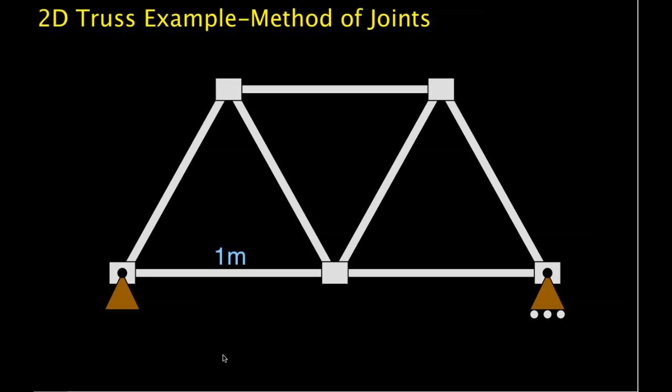Welcome to this video in which we will solve for the tensions in each of the members of this truss by using the method of joints. This truss has 7 members and 5 joints. Each member is 1 meter long, so the truss is made out of equilateral triangles, meaning every angle in every triangle is 60 degrees. The truss has a load of 1 kilonewton at the center.

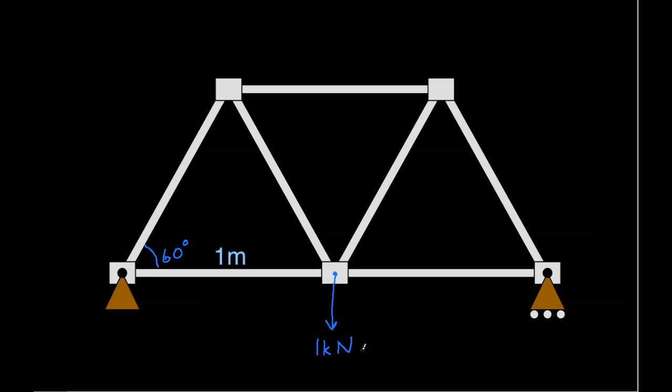With these dimensions and load, this truss might represent a small footbridge with a fairly chubby person standing in the middle of the bridge. We begin by drawing a free body diagram of the whole truss to find the reaction forces. We will then go joint by joint through the truss to find the tension in each of the members.

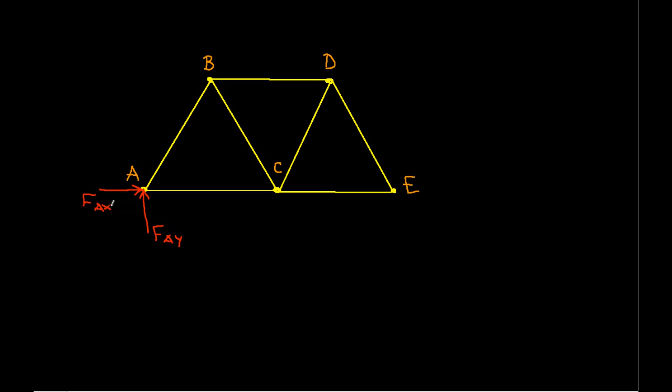Here is the free body diagram of the whole truss. We have joints everywhere the members meet, and then we have the following reaction forces. On the left we have a pin joint, so basically our entire truss is free to rotate. This will give us an FAY and an FAX. And then here we have an FEY. And at the center of the truss we have a 1 kilonewton load. Each of the members of the truss is 1 meter long.

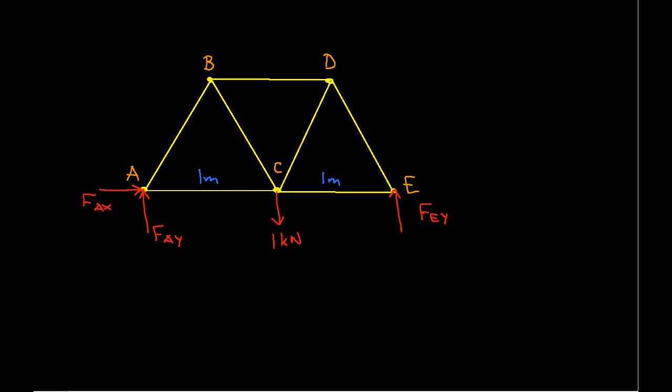Let's look at the entire truss first to find these reaction forces. If we look in the x direction, the only force is FAX, and that's equal to 0. So there's basically nothing pushing the truss either to the right or the left.

Next, let's look at the moment about A. Summation of the moments about A is equal to 0. We'll choose A because we have 2 forces going through A, so if we compute the moment about A, it makes life a little easier, and we only have 2 forces to look at. We have 1 kilonewton going downwards with a moment arm of 1 meter, going clockwise, so minus 1 kilonewton times 1 meter, plus FEY times 2 meters, since this force acts through a moment arm of length 2 meters. And this is equal to 0.

Once we solve this for FEY, we get that FEY is equal to 500 newtons.

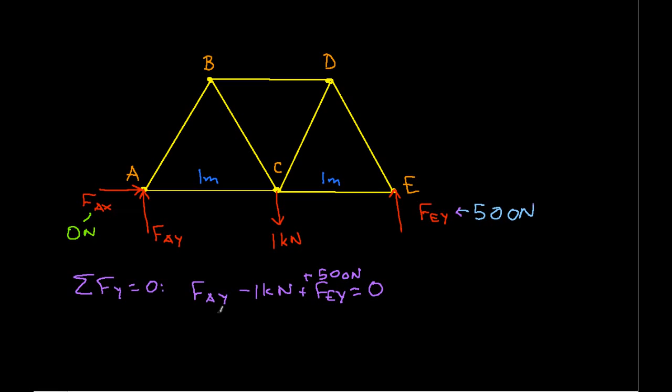The summation of forces in the y direction is equal to 0, and we have FAY minus 1 kilonewton plus FEY equal to 0. We know that FEY is 500 newtons - that's an arrow, not a negative sign. We can solve this then for FAY to get FAY is equal to 500 newtons.

So what this tells us is there is no horizontal force, and the load of the bridge of 1 kilonewton is equally distributed between the left and the right support.

Now we can go through the truss joint by joint to calculate the tension in each of the members. We assume that joints are held together by pins, so members are free to rotate, meaning they can only apply forces in the direction that the member is oriented. We also assume the weight of the members is negligible compared to the load placed on the truss, so we can neglect the weight of the members in our computations.

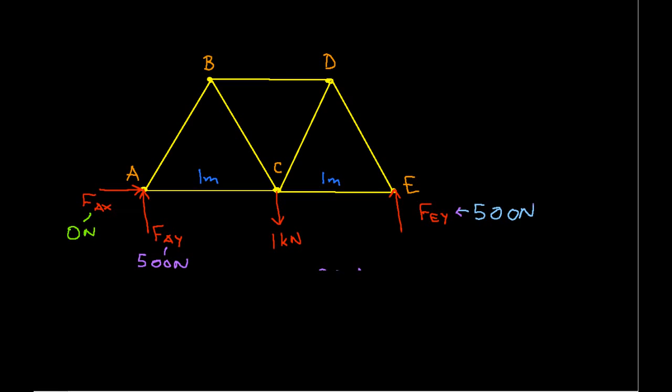Let's look then at pin A. At pin A, we had this force FAY. We have a force to the right, which is TAC, and a force up and to the right, which is TAB. Because I have equilateral triangles, all of my angles here are 60 degrees.

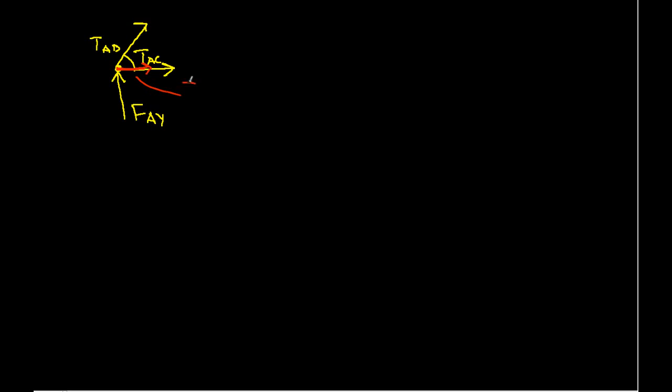At these pins, we can only apply the sum of forces in the x direction equal to 0 and the sum of forces in the y direction equal to 0, because these are points, so we can't look at moments about points. I will have components of TAB: a horizontal component, TAB cosine of 60 degrees, and a vertical component, TAB sine of 60 degrees. I won't go through this in this detail for the rest of the joints, but to make it clear, I've got an angle of 60 degrees here, TAB on the hypotenuse, so this component is TAB times cosine of 60, and this component is TAB times sine of 60.

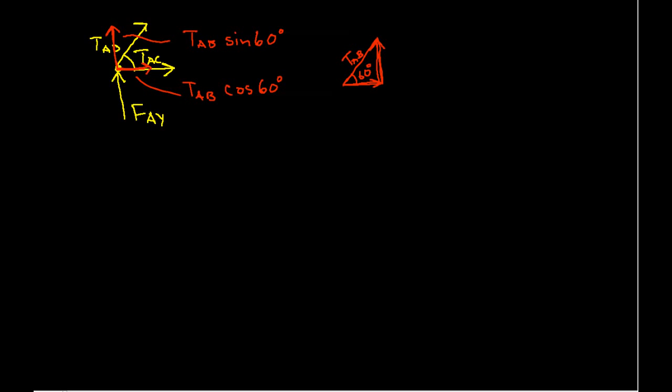So let's sum in the x direction. We have TAB cosine 60 degrees plus TAC is equal to 0.

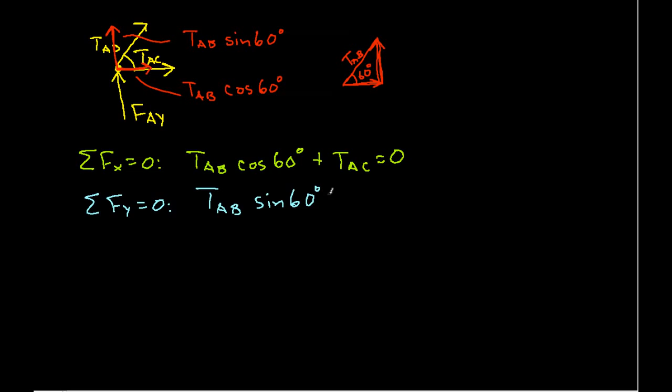And if we sum then in the y direction, we have TAB sine of 60 degrees plus FAY is equal to 0. Remember, we've already computed FAY, so we know this is 500 newtons. So we can solve for TAB: TAB will be equal to minus 500 newtons divided by the sine of 60 degrees, which is minus 577.4 newtons. If you get a negative sign as a tension, don't worry - it actually means the member you're looking at is in compression, not tension.

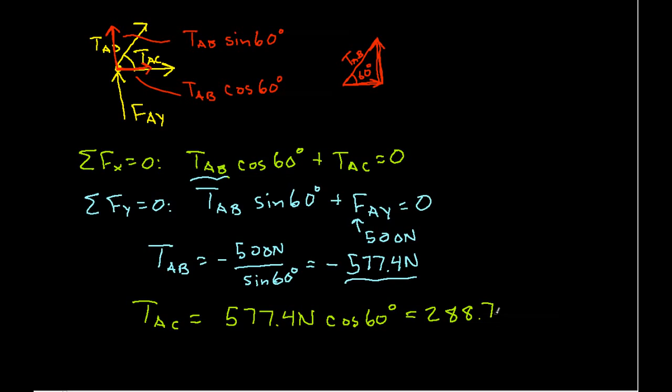So taking this number, plugging it in here, and solving for TAC, we find that TAC is going to be 577.4 newtons times cosine of 60 degrees, which equals 288.7 newtons. The next joint we'll look at is joint B, and we know that here we'll have a tension TAB, which we've already found.

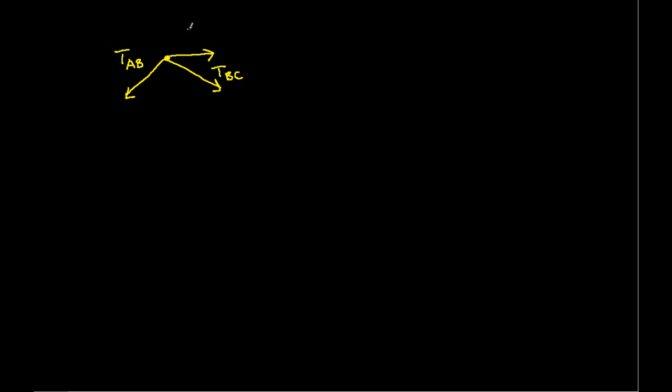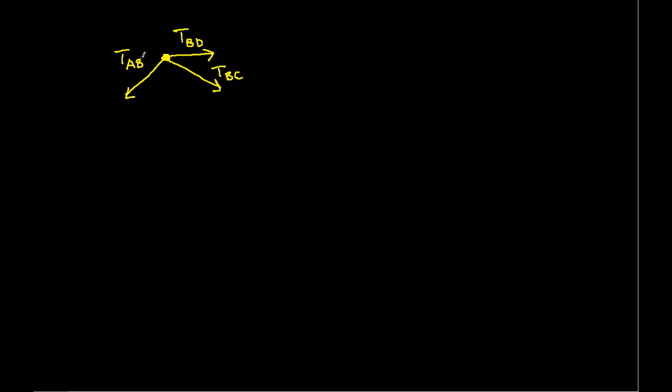So we'll use joint B to find TBC and TBD. At joint B, we have tension TAB, tension TBC, and tension TBD. These are forces. Their magnitudes are unknown. We know their directions because we know the directions of the members. And we know that the angles here are 60, 60, and 60 degrees, even though I haven't drawn it very well.

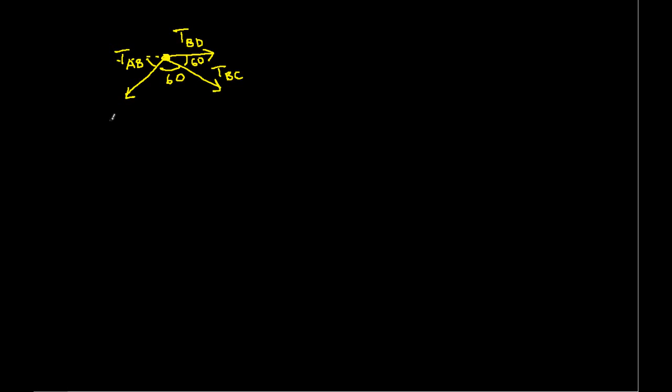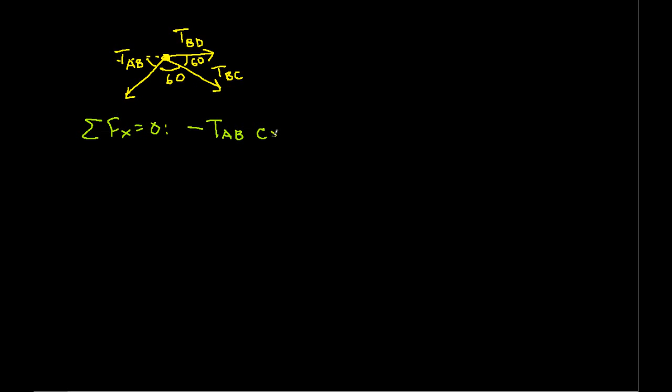Let's look at the sum of the forces in the x direction. Minus TAB, because it's pointing to the left, cosine of 60 degrees, plus TBC cosine of 60 degrees, plus TBD, and this is equal to 0.

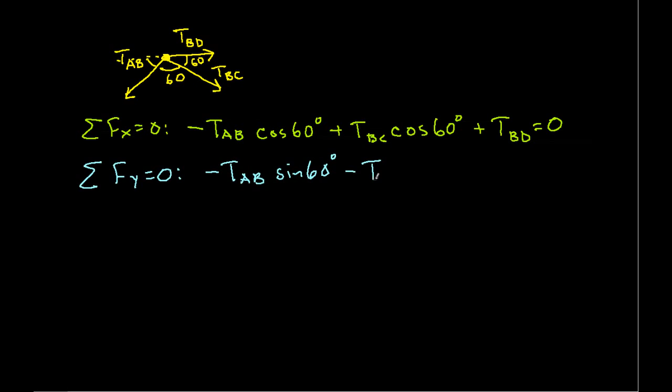So we know the value of TAB, but we don't know BC or BD, so we will have to look at the sum of forces in the y direction. And here we have minus TAB sine 60 minus TBC sine 60 degrees is equal to 0. This is the component of TAB and TBC in the vertical direction.

TBC is equal to minus TAB, and we know that minus TAB is going to be 577.4 newtons. This is from a value that we've already computed.

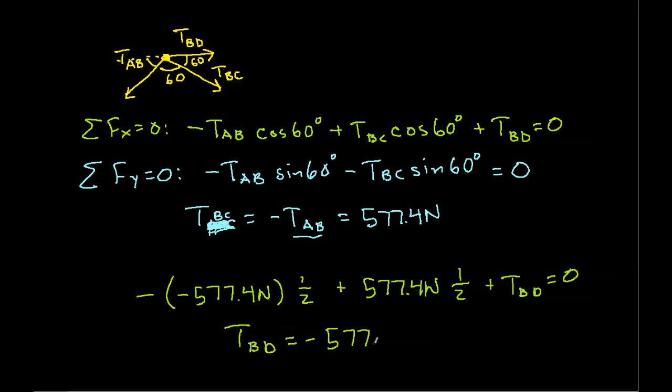If we now take TBC and plug it in here, we'll have minus TAB, which is minus 577.4 newtons, times cosine 60, which is 1/2, plus 577.4 newtons, this is TBC, cosine of 60, which is 1/2, plus TBD equals 0. When we solve this, we get TBD is equal to minus 577.4 newtons. TBC is 577.4 newtons. Again, we're making great progress here.

The next thing we'll do is we'll look at joint C and do a free body diagram there. We know TBC, we know TAC. I'm also drawing the arrows backwards because I've got a cat that's in front of my screen. One should never allow cats to get near one's computer.

Now we'll find TCD and TCE from a free body diagram of pin C. We have TAC, TCE, TBC, and TCD. We also have a load, and the load is 1 kilonewton. All of these angles here are 60 degrees.

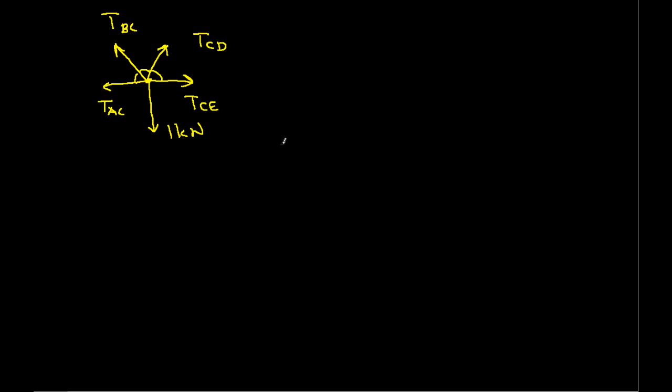As we apply sum of forces in the x direction equals 0, this will give us minus TAC minus TBC cosine of 60 degrees plus TCD cosine of 60 degrees plus TCE is equal to 0. And if we look in the y direction, TBC sine of 60 plus TCD sine of 60 minus 1 kilonewton is equal to 0.

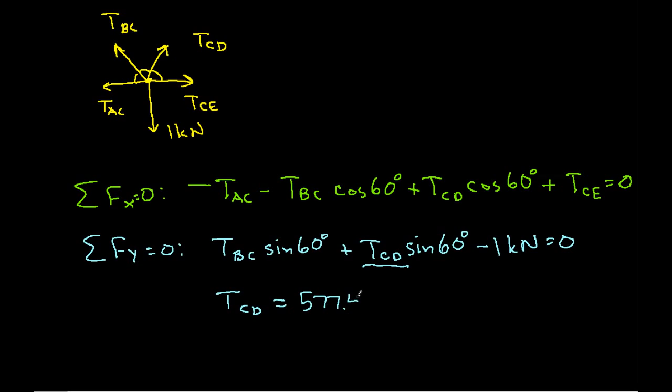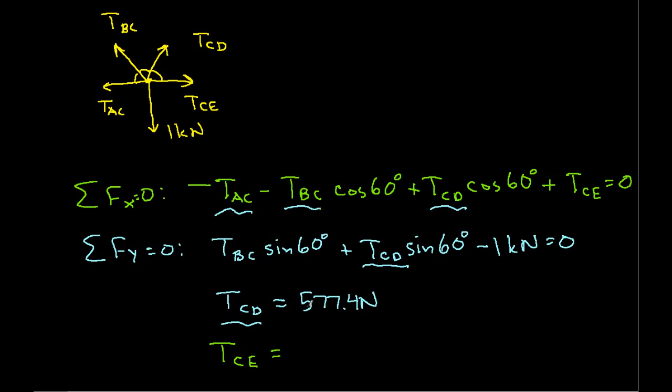And we know what TBC is. We've already computed this, and so we can solve this equation for TCD. I'm not going to go through any of the details here. We can solve it for TCD being 577.4 newtons. We can then take this expression for TCD, plug it in here. We already know TAC and TBC, so we can get TCE is equal to 288.7 newtons. We had TCE is 288.7 newtons, and TCD was 577.4 newtons. We're almost done, and hopefully you're beginning to see that there's some symmetry in these relationships.

So we ought to be able to predict what the tension in member DE is just by looking over here, but we won't. We'll go through the whole thing in brutal detail. The thing to note, though, is that I have only one unknown left. We have found all of these that I've drawn arrows for so far. So now the only thing left to find is TDE.

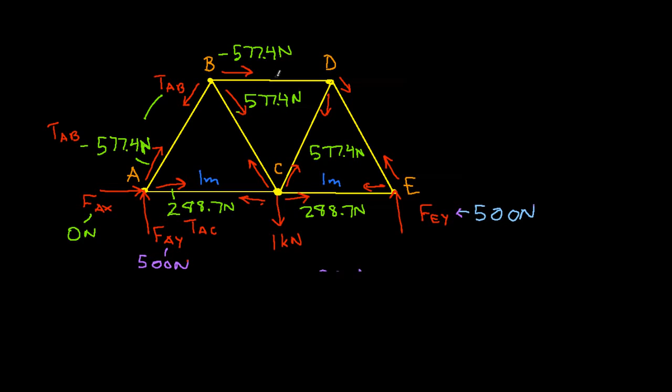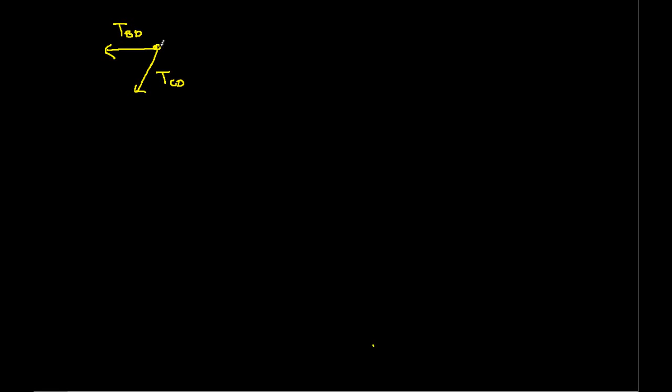So I can look for TDE either at joint E or joint D. It doesn't really matter which one I choose. Actually, let's look at joint D. The free body diagram of pin D: I have TBD going off, I know that. I have TCD, I know that. I have TDE, which I don't know.

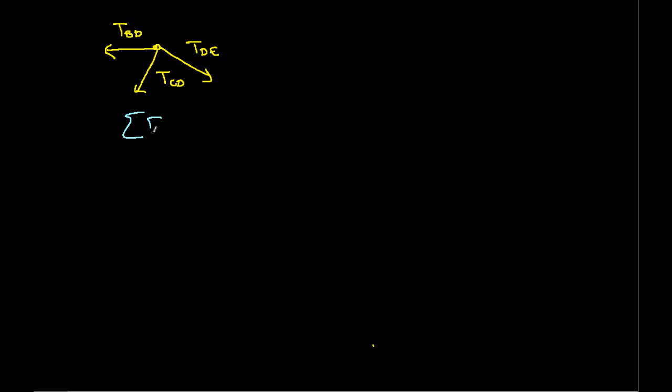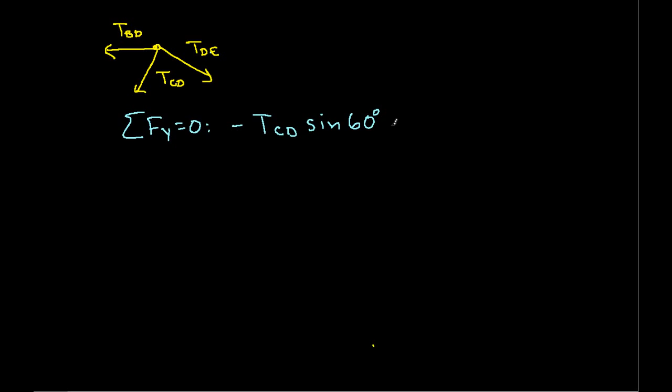I'm going to go straight to the summation of forces in the y direction equals 0. The reason I'm going to do that is if I do this, then TBD isn't going to show up in the sum of forces in the y direction, and it'll make life a little bit easier. So I have minus TCD times sine of 60 degrees minus TDE sine of 60 degrees equals 0.

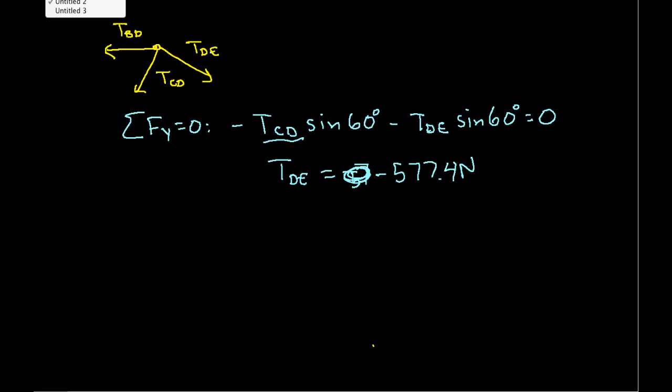And I can solve this for TDE, because I already know TCD. So I solve this for TDE is equal to minus 577.4 newtons. Okay, so I'll go back to my free body diagram and write this in. This is minus 577.4 newtons. The members where the tension is negative are actually in compression.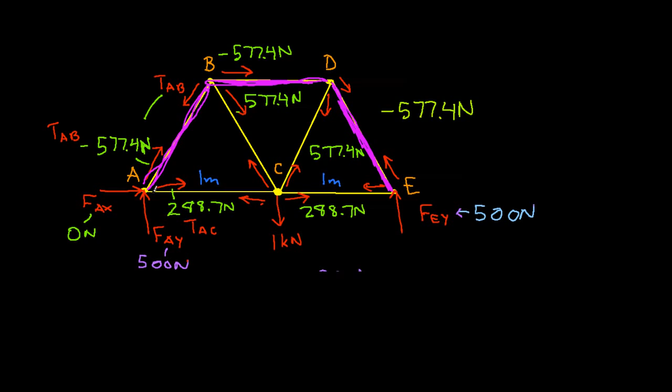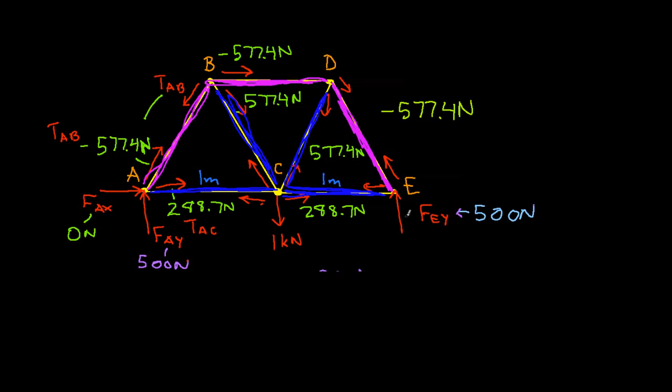So, for example, this member here, joints D and E are pushing towards each other. Joints B and D are pushing towards each other, and joints A and B are pushing towards each other. The other members are in tension, that is, they're being pulled apart. The internal members are being pulled, and the members on the edges here are being compressed. That pretty much wraps up this video. I hope you found this example helpful.